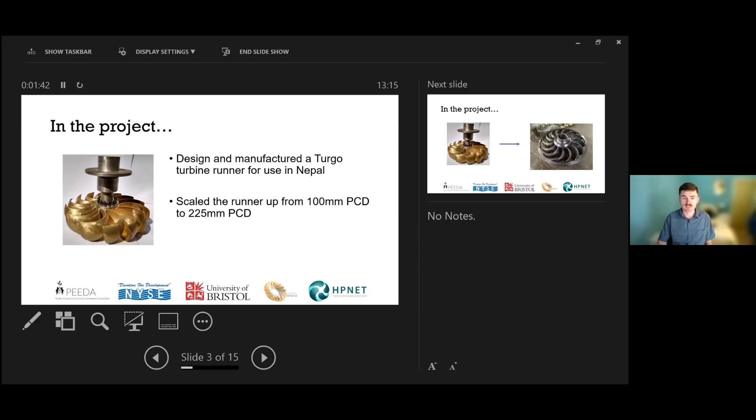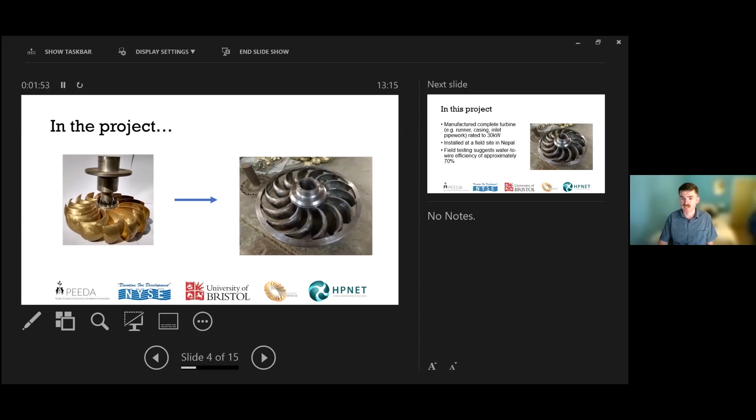So we focused on the runner, and this one that you can see here was cast from bronze and has a PCD of 100 millimeters. We tested this at the turbine testing lab in Kathmandu, then installed it in the field. In the second phase of the project, we wanted to scale this up to larger sizes, from a PCD of 100 millimeters to 225 millimeters in the image shown here.

So this turbine, as you'll see in a couple of pictures that follow, we've manufactured not just the runner, but also the casing and the inlet pipework and the other subsystems that make up the complete turbine. That's been installed in a field site in Nepal and is currently generating electricity.

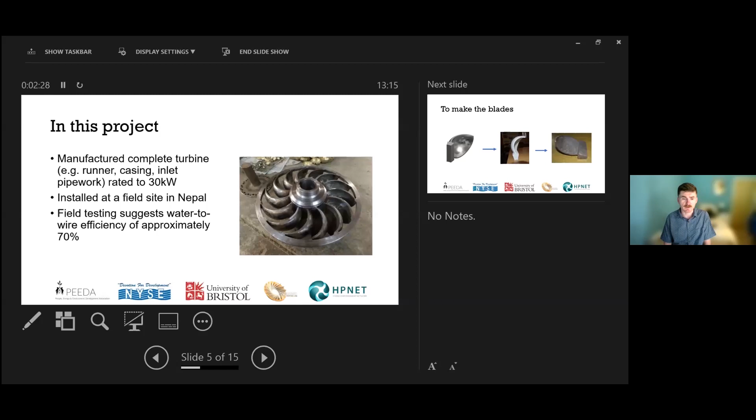We've conducted some field testing, which suggests water-to-wire efficiency of approximately 70%. So the mechanical efficiency of the runner is definitely something higher than that, perhaps in the region of 75 to 80%.

So the big challenge in making the turbine runner was making the blades. The method we employed was developing the model of the blades in CAD, and then using 3D printing to allow us to make a pattern to sandcast.

So what this meant was we could work internationally. In collaboration with the University of Lancaster, we did CFD modeling of the performance of the runner. We were able to send the CAD model over the internet and then use 3D printing locally in Kathmandu to make the pattern, which could then be used for sandcasting. So we've been able to transfer from a digital design to a physical one that's been made in Nepal.

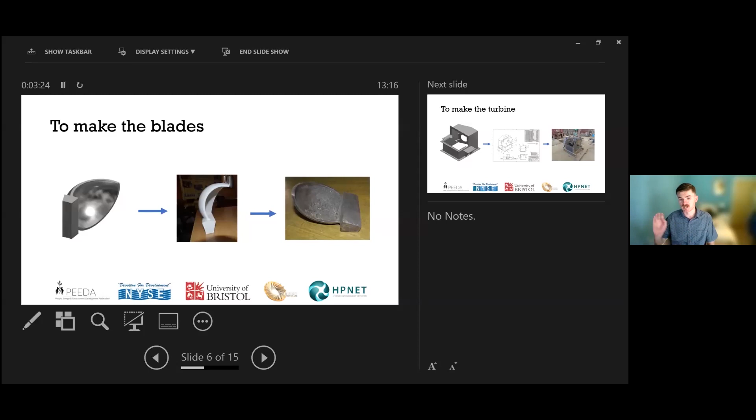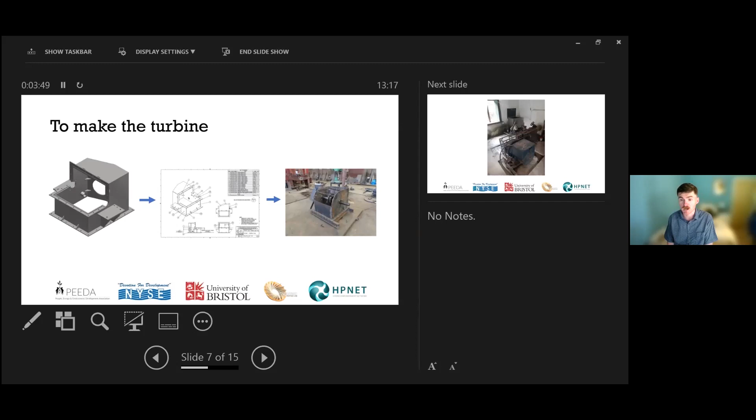We had to go through a similar process for producing the turbine. The design was done in collaboration between NYSE and the University of Bristol, and we developed a full pack of engineering drawings here in the UK that have been used in Kathmandu, Nepal, in order to produce the turbine.

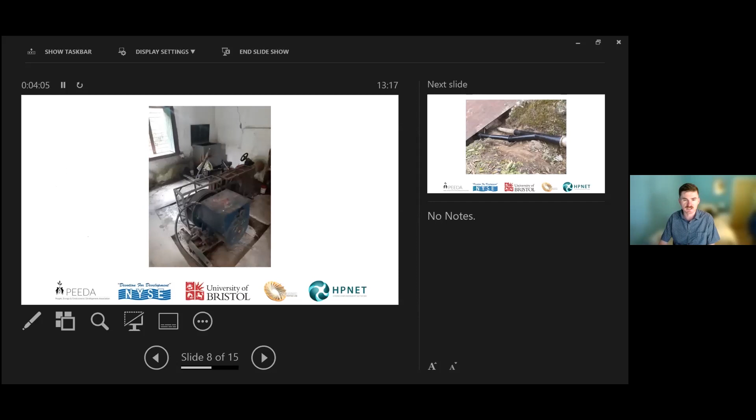So the version of the turbine that we built, we installed to replace this cross-flow turbine, which I think was around 20 years old and was producing far less than its original rated power. And so we installed the turbine alongside the other one.

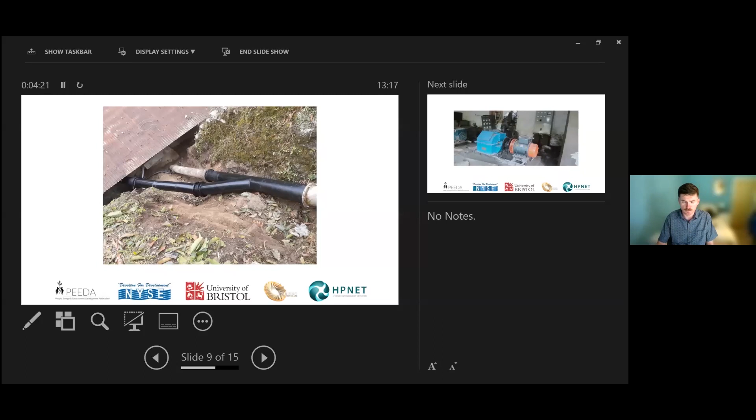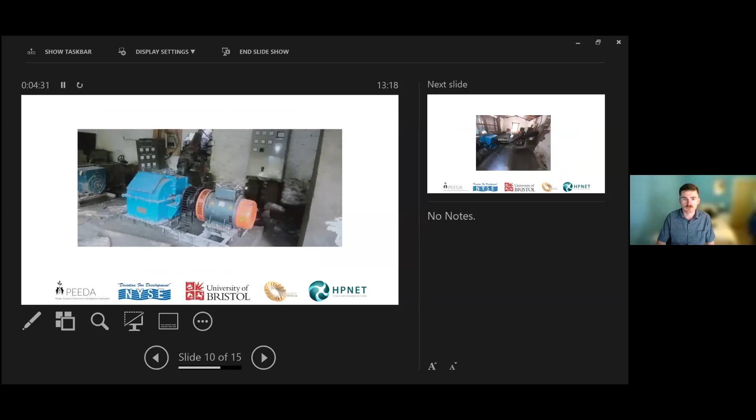We installed this Y section so that it was possible to switch the flow from one turbine to the other. And this is our installed turbine there - this is a Turgo turbine. I think this image was actually before the final concreting of the penstock pipe, and there you can see it's fully installed.

So what we're making available is the drawings for this same turbine design, and alongside that, there's a design spreadsheet. In just the same way as we use this method of 3D printing and sand casting, in order to use this design, you'll need to have access to those two things in order to use the design as it is at the moment.

As Sam mentioned, by making this design open source, what we're hoping is that the design can be used and adapted for different local contexts and potentially change depending on what's available in different local environments. So there might not just be one open source Turgo design, but different ones for different places.

So the design that we currently have, we're calling this the 225 PCD Turgo turbine design. And the way we used it was in a direct drive arrangement. So it's possible to use it with a belt drive, but currently the design that we've developed is for direct drive.

Because we have a single runner design and a single casing design, but we know that heads and flow rates vary from one site to another, it's actually possible to change some of the other dimensions. You'll see in the drawings that there are dimensions that are labeled that can be changed to allow you to vary and increase the number of different sites that it can be used at.

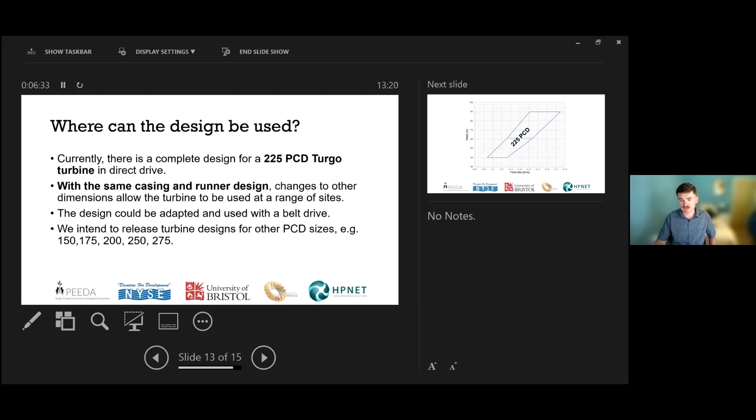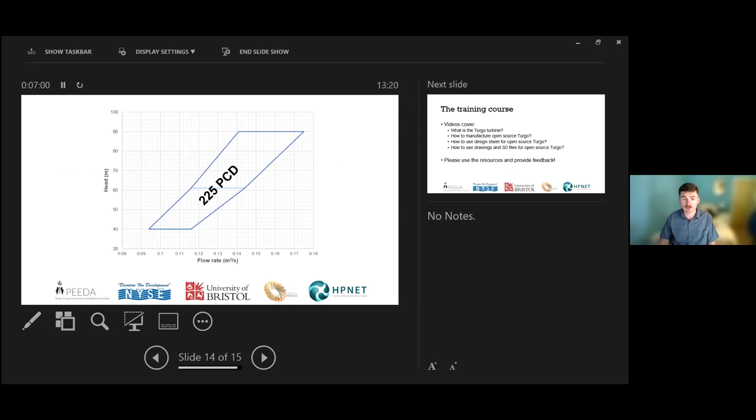This is the beginning of our journey into this open source Turgo design. Currently we have just this single 225 PCD, but we hope to release further turbine designs for different PCD sizes to allow you to extend the range of sites where a Turgo turbine can be used. This shows approximately where we think this turbine design can be used. Below 40 meters, generally it would be more appropriate to use a cross-flow turbine, but we hope to develop the PCD sizes to go on either side of this one, because these are regions where the Turgo turbine potentially could be used.

So once you've been able to access the training course, you'll find 4 main videos. These cover what is the Turgo turbine, how can we manufacture it, how can the design spreadsheet be used, and how can the drawings and 3D files that are provided be used.

So what we would like is you to use these resources, but also provide feedback to us. We want to know what you might change about the design, how you might change the way the drawings are presented. Is there any other additional information that you would use? We look forward to hearing your experiences of using the resources.

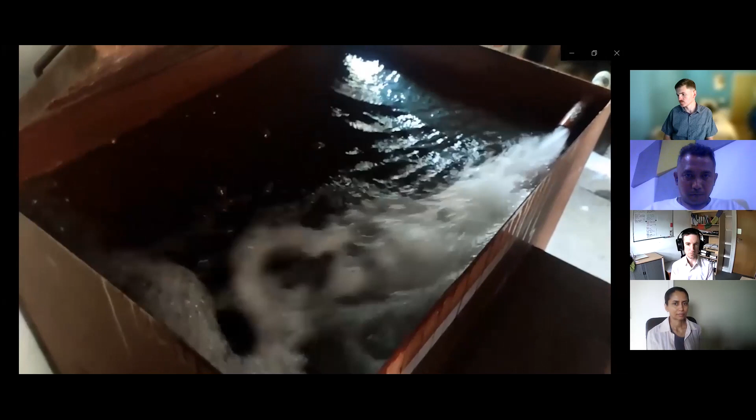As you all noticed, most of the components that we have used there are very much similar to the Pelton turbine. The only difference, like I said before, is the design of the bucket.

And being a local manufacturer, although all the drawings are provided and in place, we always need to find a way to use these drawings in our own way rather than just copying them. We always want to make our product different, more efficient and more practical.

It doesn't mean that because this is a Turgo turbine, we need to get a CNC machine. No, that's not the case. You want to make it locally, at an affordable price for your local community. You want to repair anything that's manufactured locally, rather than having to bring expertise from abroad.

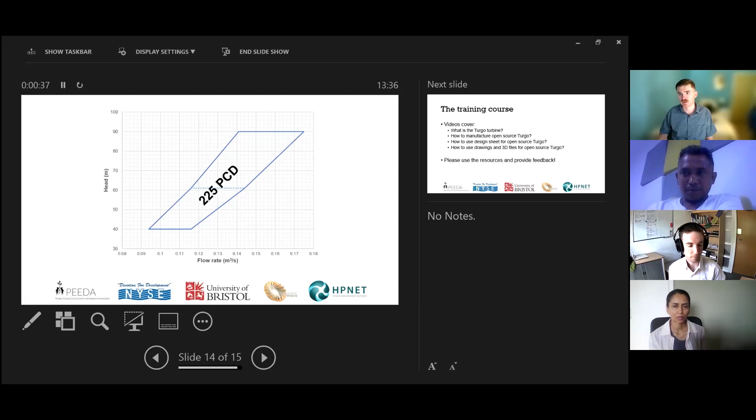I guess the Turgo can, I'm going to say, very easily be used at low head. There's no reason why it can't. And we've done some experimental testing here in Bristol, and actually at the TTL I think we did some on the 100 PCD Turgo at lower head as well, Joe, didn't we? Yeah, that's right. And it maintains quite a high efficiency. Obviously the drawback for using it at low head is you've got a lower rotational speed, so you can't do direct drive generally, and quite often you'll need to step up quite a lot to match to a standard generator. But it is possible, and we haven't noticed a drop in efficiency at lower head either.

I think for the 200 watt to 2 kilowatt Turgo turbine, the head is 16 meters or something like that. I think you're right, it was about 15 meters, wasn't it? Yeah, so it's possible. Like I said, the only difficulty is that the small Turgo turbine, like 2, 3, 4 kilowatt, is very difficult to machine. Otherwise, I don't see any problem using it. The question I got from Mr. Ramaji is a 5 kilowatt for 10-20 meter head. I think for that it's better to use a cross flow turbine rather than a Turgo turbine. It will be a lot cheaper and easier.

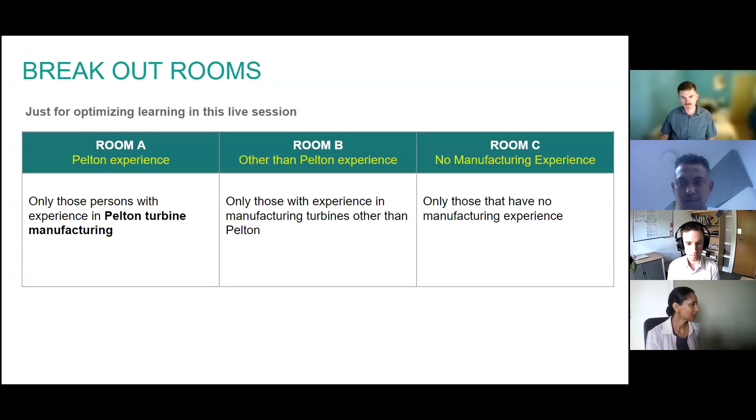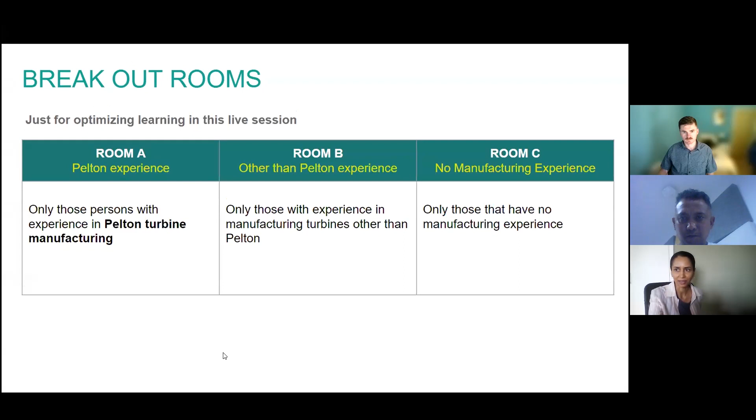So in room A, we would appreciate if those that have Pelton turbine manufacturing experience select room A when we open the rooms. For those that have manufacturing experience, but not yet the Pelton, you can choose room B. And those who are very interested but still need to build manufacturing experience can join me in room C. So with that, we'll open the rooms and meet for about half an hour. Okay, you can go ahead and choose your rooms. There won't be anyone here in the main session until about half an hour from now. Okay.